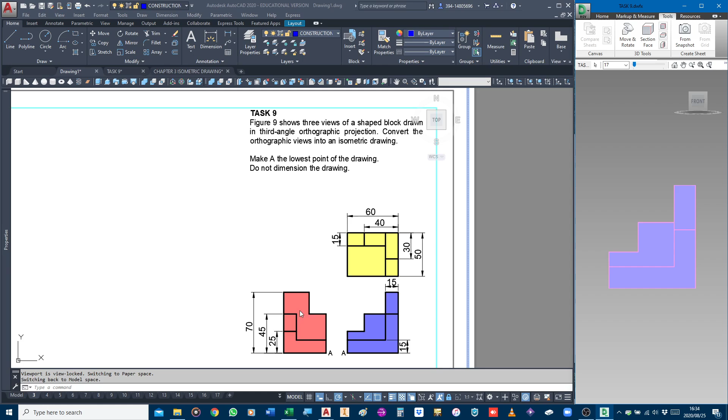So if we go into the isometric drawing itself here, with A as my lowest point, if I look in this direction, that will be the front view. If I look in this direction, that will be the left view. And if I look from the top, that will be the top view. So if I look at my question itself, that there will be the first shape that I draw.

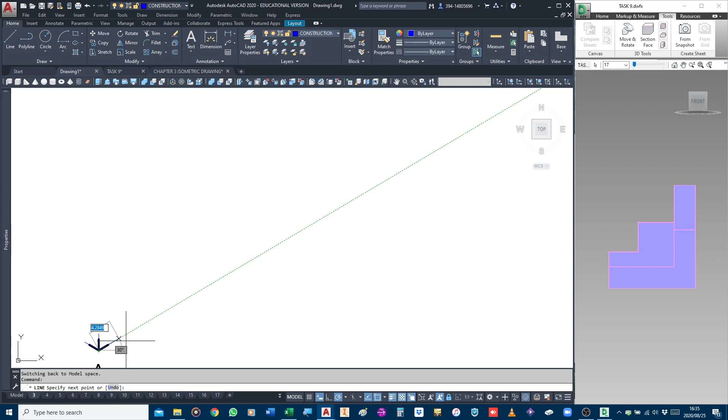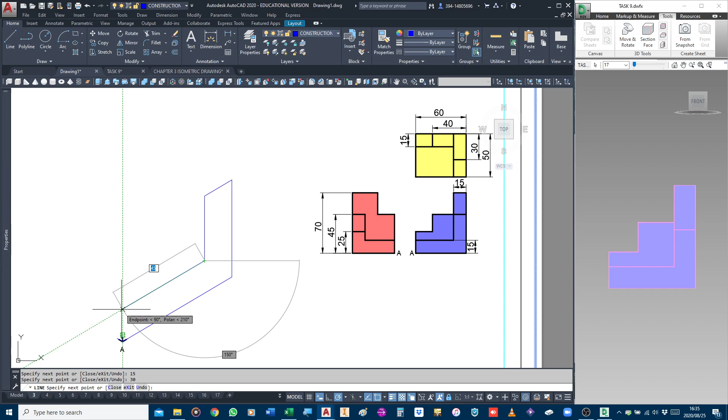So if I look at the width here, that's 60, that's 15 for that height, and the height for that one there is 45. So if I then start drawing, I can go here, and that distance there, remember we said that that is 60. Then we're going to go 45 millimeters up. The thickness there is 15. Then remember now coming down, 45 minus 15, that will be 30. 15 off 60 gives us 45, and there is the first surface drawn.

Now immediately, like I said to you, there's so many different ways of drawing isometric. I just found through the years that this is the easiest method that I can think of. So if we now look at what we've got here, we are now at that surface there. So that surface there now, if I compare it to my other two views, I can now see it is that rectangular surface there and that rectangular surface there.

So how far does it go back? It goes 20 back and that surface there. So now I can go from there, 20 millimeters back. That's 15 wide and 20 millimeters back. So now I've done that part.

The next one that I want to do is that one going straight up, which is that one there. So now that's a total of 70. So 5 of 70. So that will give me another 25. So I now start from here. 45 to 50 is 5. 50 to 70, so it's 25 extra. That is 15. And then we go down. So again, I can now make that dark.

Okay. If I now look at the top surface here, that is 30 going back, and that gives me all of that information at the top. So again, I can now go from there, 30 millimeters back, and 15, and 30 millimeters back. Okay, so that is the information that I've been given between the front view and the top view.

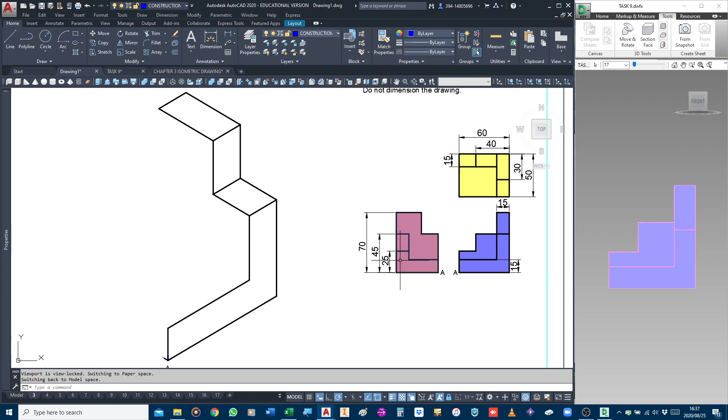I can now do exactly the same using the left view. So again, that's 15 up, that's 25 high, that's 15 wide. So again, I can now go from here, start on that corner. Oops, I must just start on the right corner, otherwise these things are not going to line up properly. That distance there, the width is 50. The height in this case is 25. Then that is 15.

The difference between 25 and 15 is 10. So that means this here closes down very nicely. So immediately, that is already information that I can draw. So if I now look, there's the shape that I now got to follow. So if I look at that, that's now where that 45 comes in again. So that distance, how far is that? That's 60, so that's 20 back. So now I can go from here in that direction, 20 millimeters back, 15 wide, 20 millimeters. I can make that dark.

Okay, now how far does it go up? Remember we said that's at 45 because those two are in line. So now that being 25 high, that means that this must go another 20, 15, that's the width for that. Okay, and then this one now goes the last bit, 15 off. Okay, remember now that's 40.

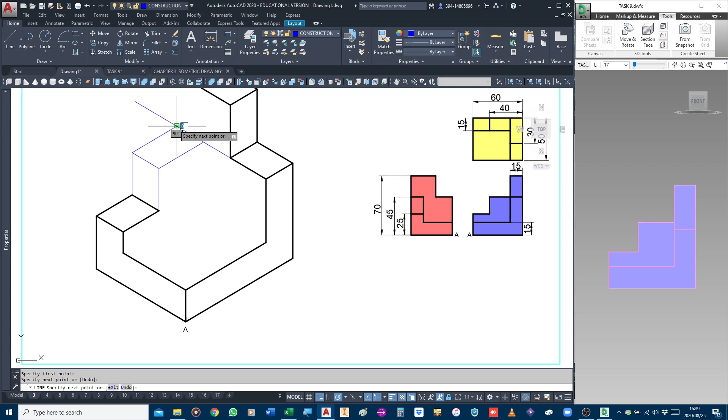Now I just got to do my sums here properly because I know that one I can do it that way too. So instead of doing the sums, as you have just heard, my mathematics is not as good as it should be. So there we go. Okay, and the last few lines that I need to insert, that one goes to the top, this one goes backwards, this one goes down, this one goes backwards, and look at that, we have now got our answer. As quick as that.

And like I say, and I'll say it again, doesn't matter which direction we go. There are so many different methods of doing an isometric drawing. But now I just want to show you that the answer is correct. So again, we're looking at the front view. So if we look at what I'm showing you there, between the 3D model and the isometric, those two look exactly the same. Okay, if we look at the left view, all of that information looks the same as well as the top view.

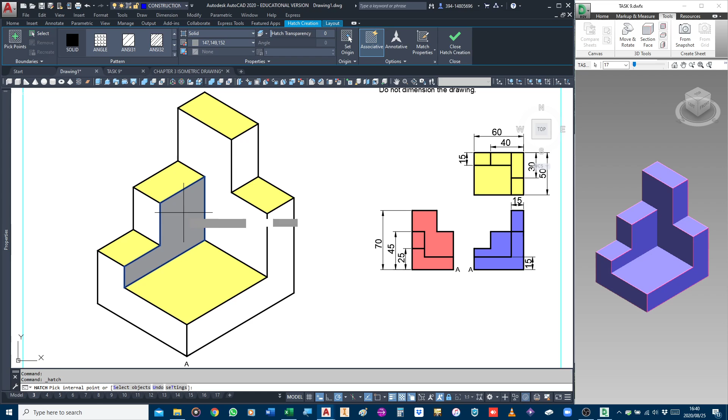And if I then want to do the last bit to make sure that you guys agree with me, that is top view, that is top view, that is top view. So if I say match this property to these, they are now the same. So those surfaces are all at different levels, and that is what that looks like. My front view, I've got to put the hatching in first. The hatching is front view, and front view.

So again, I can match that there to there. You can now see that that L bend is there, that surface is there, that surface is there. And then the last one is for the left view, which is this one, and this one. And if I go and match that, they look the same color, that is what we see. So again, that surface there is that surface there. This surface here is this surface here. And this surface here is that surface there. Okay, I hope that that has cleared any questions that you might have on isometric drawings.